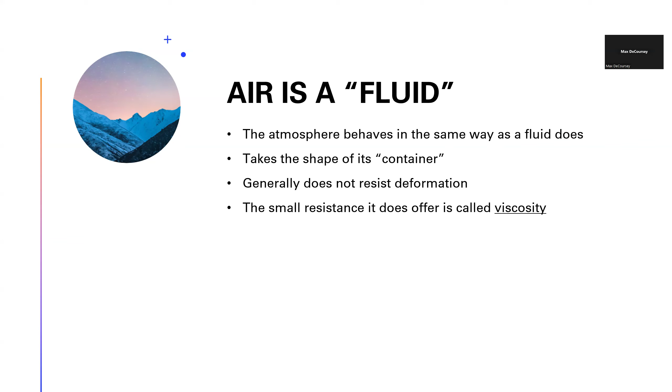They say that a fluid generally does not resist deformation—that's the whole idea of taking the shape of its container. So if you move it from one container to another, it won't try to retain its shape like a solid will. The small resistance it does offer is called viscosity. I don't know why the PHAK wants to talk about viscosity, but I'm just following the headers in the PHAK.

So the next thing they talk about is viscosity. If you don't know what that is, it's basically how runny a fluid is. Things like honey have a very, very high viscosity—the molecules in honey stick together very well. Things like water have a lower viscosity, and according to this chart, methanol has the lowest viscosity, nice and runny.

The only time you're really going to hear about viscosity specifically in flight training is talking about engine oil. The reason is the oil is more viscous, or thicker, when it's cold. That's why if you read a POH, they'll have warm-up times for the engine. When you start an engine, you'll want to leave it at 1,000 RPMs or whatever they prescribe for X amount of minutes or until the oil reaches X temperature. That makes sure you're not pushing this thick, very viscous oil through the engine at high power settings, which can damage it.

This is also half the reason why, sometimes when you start up, it's a good idea to lean the mixture out. By leaning the mixture, the engine runs a little hotter, which helps the oil heat up quicker, and it also keeps you from fouling your spark plugs, which we'll talk about when we discuss systems.

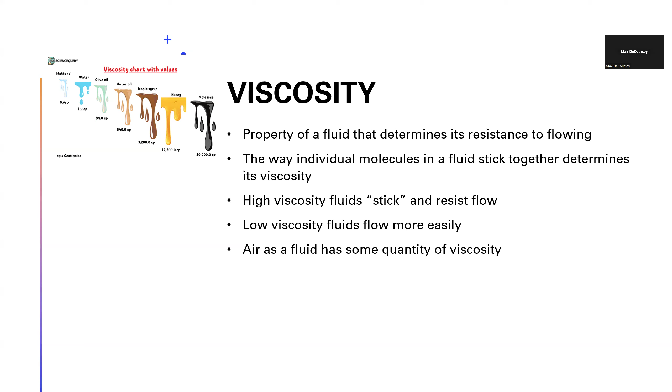Next thing they talk about is friction. It's impossible to create a perfectly smooth surface. Every piece of the airplane creates friction with the air. This picture is a zoomed in photo of the wing. It looks smooth, but microscopically there are little ridges. What this does for the airplane, besides being a form of drag, is...

...the particles very close to the surface of the airfoils have almost no relative motion. We call this the boundary layer. So the boundary layer is the layer of air close to the surface that does not move, for the most part, relative to the air around it. When you hear the term boundary layer, especially talking about stalls, you'll hear about separation of the boundary layer, and that's happening during a stall. That boundary layer becomes no more.

So that boundary layer, could you think of it as almost like a blanket of air that just doesn't move? It's so tight to the wing then. Yeah, pretty much. It's stuck in these ridges pretty much, and they create kind of a static layer of air on the airfoils.

I don't really know if it really does anything, quite honestly. I'm sure it has some sort of effect, but the only time you're going to hear about this boundary layer for the most part is when they talk about stalls, because when you stall, you exceed that critical angle of attack, and that boundary layer finally separates because there's not enough air making it over the top of the wing to create a boundary layer for you.

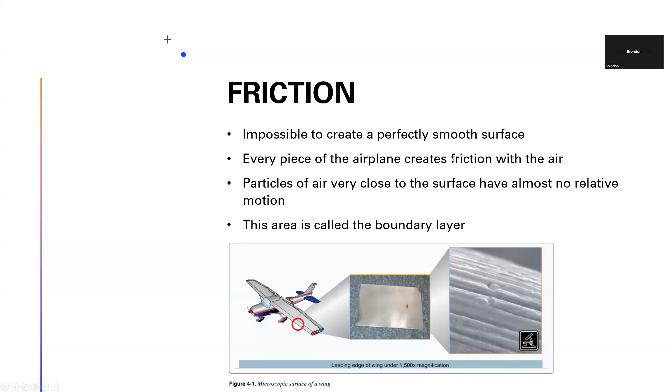Cool. Next thing they talk about is pressure. They define pressure as the force applied in a perpendicular direction to the surface of an object. Normally we measure pressure in pounds per square inch, so this is what you pump your tires up to. An object completely immersed in a fluid, in this case the atmosphere, will feel pressure uniformly around the entire surface of the object. We're feeling atmospheric pressure all around our body, on my arm, on my leg, not just on the top of my head.

And if the pressure exerted on one surface of an object becomes less than the pressure exerted on the other surface, the object will move in the direction of lower pressure. This is important when we're talking about performance and systems later: pressure in nature always wants to equalize. If you remember that the flow of pressure is always going to be from high pressure to low pressure, you can think your way through a lot of problems.

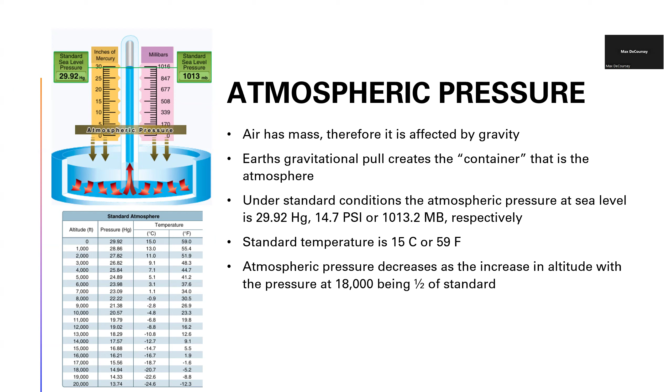As you remember from class, we have lapse rates. The lapse rate is the average change in whatever we're talking about, and we talk about it in terms of thousands of feet. So the average pressure lapse rate is 1 inch of mercury per 1,000 feet—every 1,000 feet you go up, you're supposed to lose 1 inch of mercury.

Now, in theory, does that happen? Not in my experience, right? Because we've talked about this a few times. That would mean the pressure at Delaware, since it's about 1,000 feet above sea level, should always be 28.92, and I've never seen that before. But we base observations and stuff like that off of this average pressure lapse rate.

The difference in these is because wet air holds heat better. Remember from class that water is a great heat sink—it holds heat very well, and it's harder to change the temperature of water. So its lapse rate is less than the dry adiabatic lapse rate, which would be completely dry air without any moisture in it. I don't know how you take the dry and wet adiabatic lapse rates and get 2 degrees as the average temperature lapse rate, but that is what they say the average temperature lapse rate is.

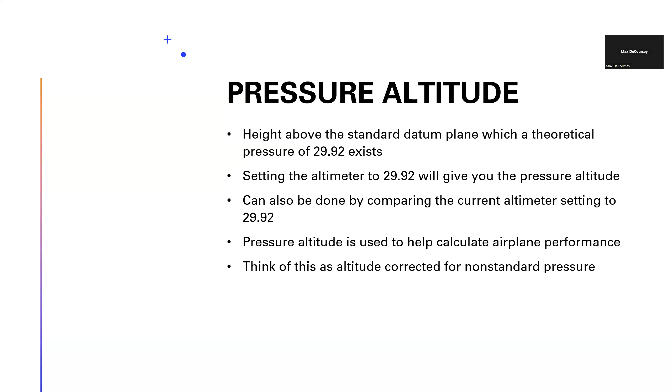The reason we need to know about pressure altitude is because it's used to help calculate airplane performance. A helpful way to think about pressure altitude is as altitude corrected for non-standard pressure. The reason I say that is because when we define our next term, density altitude, the FAA defines that as pressure altitude corrected for non-standard temperature. So this is the altitude the airplane feels like it's flying at. This is critical for determining how the airplane is going to perform, okay?

So a high density altitude—if the density altitude is like 8,000 feet, that's a bad thing. You don't want the airplane to feel like it's flying at 8,000 feet when you're only at 2,000. Low density altitude is a good thing. So sometimes in the winter in Ohio, you go outside and it's negative 800 density altitude, that's a great thing. That means the air is going to be nice and dense, and we know that the airplane loves dense air.

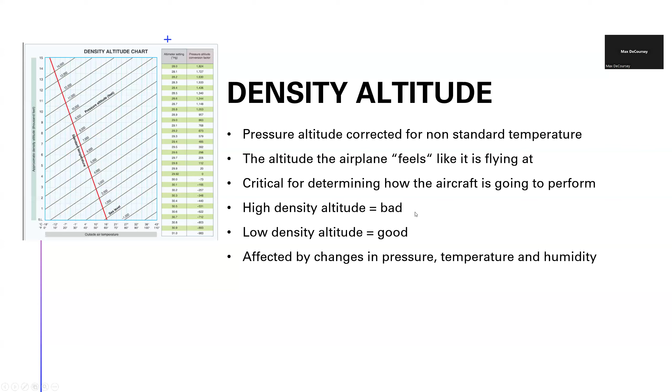Effects of temperature on density. To think through temperature, pressure, and humidity and how they relate to and impact our performance, whether they make it better or worse, all you need to know is how those things impact the density of the air.

An increase in density is a good thing for performance. A decrease in density is a bad thing for performance. So like we talked about in class, temperature on a particle level is just measuring the amount of collisions between the molecules in a substance—in this case, the atmosphere.

So when you have a really high temperature, the molecules are very active. You can see these lines drawn are larger, symbolizing that they're moving more. What this means is the density is going to be lower—these molecules expand because they're moving with much more velocity or vigor, and that reduces the density. That's going to increase our density altitude. A decrease in density increases our density altitude, which is a bad thing.

Lower temperature actually condenses the molecules, bringing them closer together. That decrease in temperature increases the density of the air, and an increase in density is going to decrease our density altitude—that's a good thing. It can get confusing talking about it, but if you can just remember what's happening to the density of the air, that's how you can think through what's going on.

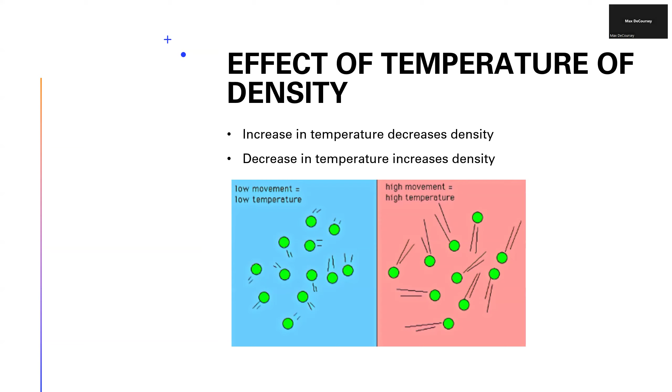There we go. The effect of pressure on density.

So higher pressure is going to be a higher density, and a lower pressure is going to be a lower density. It's the same picture from earlier, but on the right side here, this high density, or high pressure, would be great for us because all the molecules are packed nice and tightly together. This means more molecules will be going into our engine in the same distance compared to this.

A lower pressure is going to be a lower density. So if we flew across this line right here, we may only hit 3 molecules of air. If we flew across the same line here, we're going to hit 8 or 9 because the pressure is higher. So a lower pressure equals a lower density, which equals a higher density altitude. Worse performance.

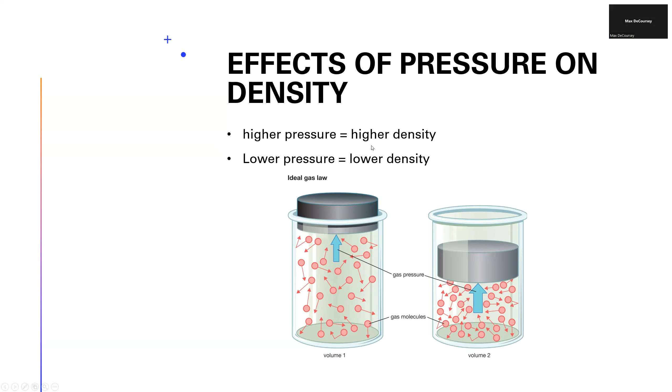Humidity and density. Humidity is the least of the 3 factors that contributes to our performance. But the way that it affects performance, water vapor is lighter than air, so when humidity is high, that air is less dense than lower humidity air. So high humidity equals low density, which equals higher density altitude. Low humidity equals higher density, which equals a lower density altitude.

Like I said in class, humidity is like the third distant factor when we're thinking about performance. In most, all performance charts will have you account for the atmospheric pressure and have you account for the temperature. I've never seen a chart that has a humidity value.

So this is more like, if you're already right on the edge of the performance you're comfortable with, and it's 100% humidity and very humid that day, it's probably just a good idea not to fly. It's just one more thing to consider.

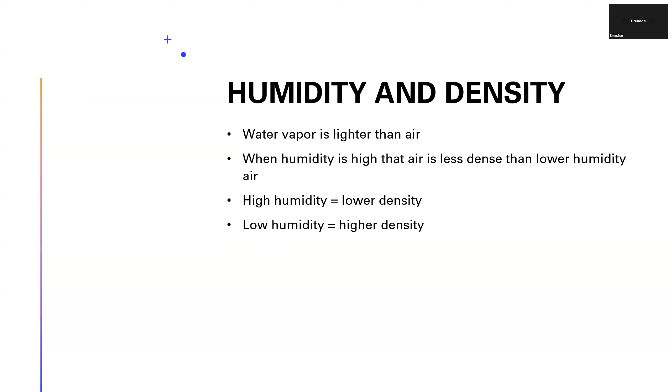Okay, lift production. So Newton's laws, these are good to review. The first law: a body at rest will remain at rest, a body in motion will remain in motion unless acted upon. The second one is force equals mass times acceleration. And the third one is what we are concerned about: for every action, there's an equal and opposite reaction.

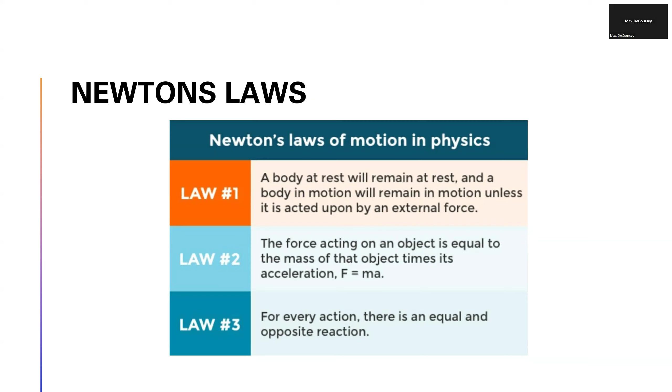So if you go in the PHAK, the FAA, because the PHAK is FAA sanctioned material, sanctions two separate explanations of lift. One is Newton's third law, and the other is Bernoulli's principle.

So for Newton's third law, it's as simple as: we fly along, the airfoil is shaped in a way that it deflects air down, and because it deflects air down, the air pushes the wing up, and we fly if you go fast enough.

You can apply the same theory to the jet engine. The jet engine pushes air out the back, and as it pushes that exhaust out the back, that force pushes the engine forward. Same thing with the prop - the prop is pushing air behind us, which is pulling us through the air.

So that is the way that you can explain lift with Newton's third law. I mean, you can do this in your car. You're driving down the road and you put your hand out the window and you tilt your hand up and your hand wants to fly way up. You tilt your hand down, your hand wants to move down. So that's one way to explain lift.

The next way to explain lift is Bernoulli's principle. Remember, Bernoulli's principle is the idea, or the reality, that when the speed of a fluid is increased, the pressure decreases. And remember that we consider the atmosphere and air to act as a fluid.

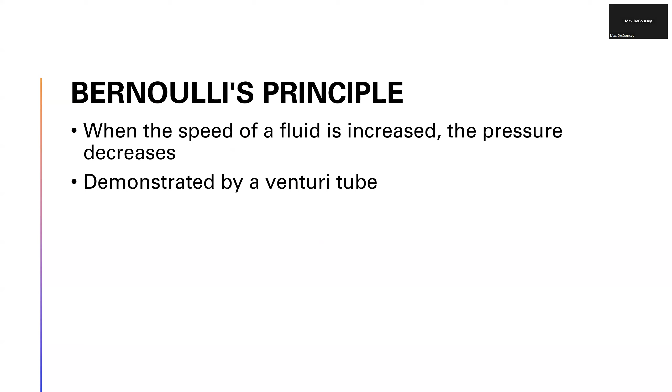And we can demonstrate this by a Venturi tube. You might remember that term from when we talked about carburetors - this is how carburetors operate on this principle also. But what happens in the Venturi tube is the inlet and the outlet are the same diameter, but on the inside, they have a little throat right here. What this throat creates is a choke point.

And what it necessitates is that the air that is up here gets squeezed, and in order to make it out at the same time as the air that was in the middle, this air has to accelerate. And when it accelerates, the pressure decreases. That's what you can see on these meters right here, so the pressure's here.

That looks like it's 5 and 5, the pressure and the velocity. Then as it goes through the inlet, through the throat, it goes up. The pressure decreases down to 3, the velocity goes up to 7. And then as it goes out, it equalizes again.

Okay, so this is an observable phenomena. To me, honestly, it kind of seems counterintuitive that when you squeeze this, the pressure goes down. I understand why the velocity increases, but that's what I was thinking too. You'd think squeezing it would make the pressure go up. Yeah, I think the only answer is that it speeds up so much that the pressure actually decreases because the molecules are putting space between each other. That's got to be the only explanation.

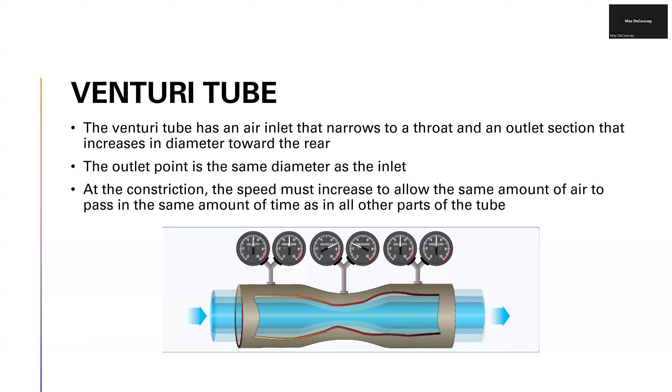But this is an observable theory. This is true, it might be a little counterintuitive, but this is what's happening in the carburetor. This is what a carburetor does in order to pull air in and then mix the fuel in the air, vaporize the fuel in the air. And this is also, as we know, the principle that allows the wing to fly, right?

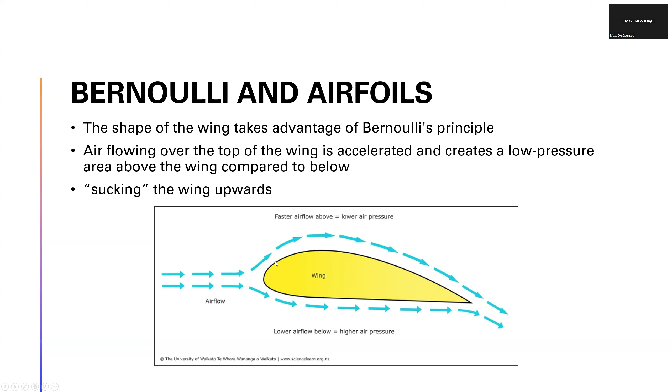One thing to talk about here, we've already defined angle of attack from class. Remember, angle of attack is the difference between the chord line and your relative wind. When you change the angle of attack, you also change the center of pressure along the wing. The center of pressure is also known as the center of lift, and that is where your lift vector or lift forces will be acting through on the wing.

So when you lower the angle of attack, the center of pressure moves backwards. When you raise the angle of attack, the center of pressure moves forwards. When you stall the airplane, your center of pressure moves as forward as possible, and then it drops all the way off, it goes all the way off the back. I think you're on the commercial written, that is a written test question, so you might see that eventually.

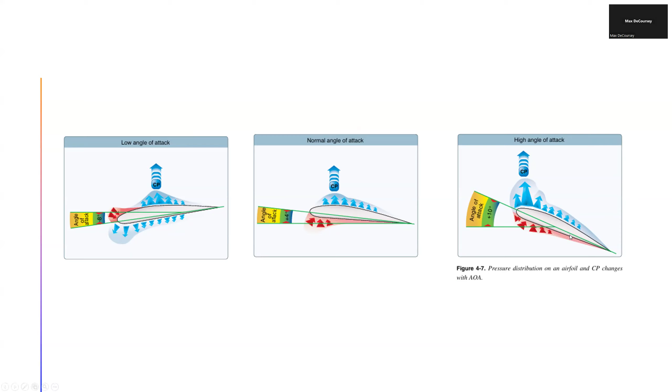Okay, any questions on that, on lift production, guys? Bernoulli and Newton? No, I'm good.

Okay, so now we're going to talk about aerodynamics. And I did the first like 3/4 of this chapter. This is a long chapter, so next week, if you guys join, we're going to finish this chapter and do the next one.

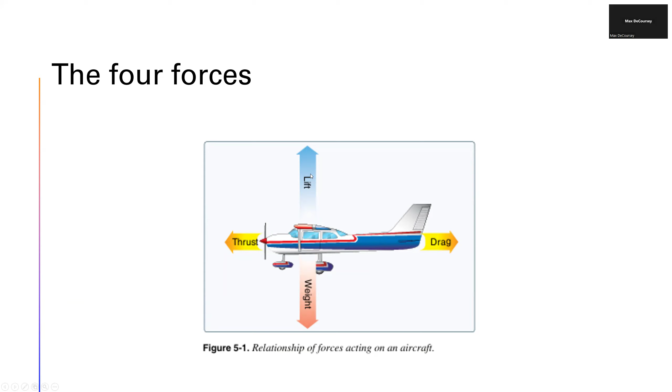But first slide, we've got the 4 forces, guys. Most of this is going to be review. Lift and weight, thrust and drag. So lift and weight in level unaccelerated flight. And the FAA, this is what the FAA says. Let's go to the chapter and I'll show you what they say. The sum of all the upward forces is equal to the sum of all the downward forces.

So it's right here, I don't know why. There we go. Not just lift is equal to the sum of all the downward components. And then the sum of all the forward components is equal to the sum of all the backwards components. They say this because you can see this, this is stabilized, so unaccelerated climb. Some of the lift is acting forward, and some of the weight is acting backwards as drag. I don't know, guys, that's what the FAA says.

But I know that's a written question on your commercial, and I think it can be on your private. I don't know if you've seen it when you've been studying or not. But so unaccelerated flight, that's what we're seeing. In accelerated flight, guys, accelerated flight can mean you're speeding up or slowing down. These are no longer equal. So in accelerated flight, your thrust is going to be greater than your drag. And in decelerated flight, your drag is going to be greater than your thrust.

Lift equation, guys, this is very important to remember. Like I said in class, you're never going to be given numbers or values and have to do actual math, but it's important to remember this so you can understand the different ways that you can affect how much lift the aircraft is producing. So CL, the coefficient of lift, this really is just the angle of attack.

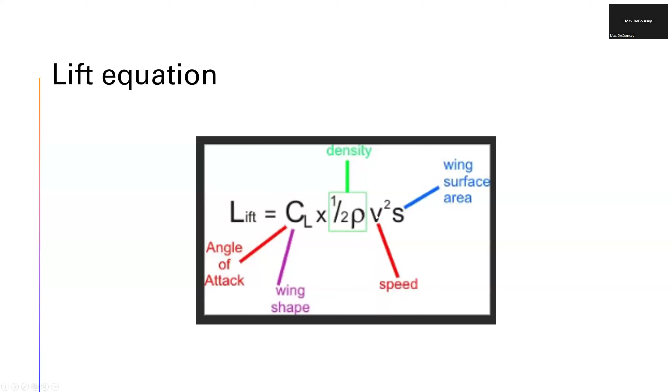Angle of attack, guys, just a review on angle of attack. The angle created by the difference between the chord line and the relative wind. Remember, always remember, the relative wind is always parallel and opposite the direction of flight, guys. This can be a written question for your commercial too. It's not parallel and opposite the horizon. It's not parallel and opposite the wing. If it was parallel and opposite the wing, then there would never be any angle of attack, right? So your direction of flight is going to determine where the relative wind is. And that is why we can stall at any airspeed, right?

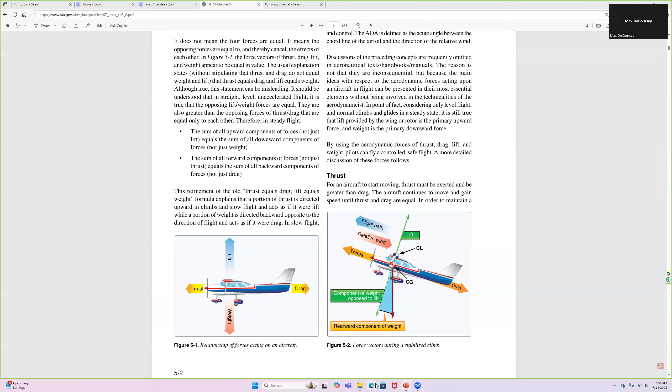I think on the next, I didn't put it in here. They're showing on this, they show a dive. I think I put it in later about stalls, but we'll just talk about it right now. And then we can skip later because I'm on a tangent right now. Jeez. I told you this was a long chapter.

So think about in a dive here, guys. You have all this momentum going downwards. And if I yank the plane upwards, I'm going to get an elevator response that raises the nose, but the airplane's still traveling downwards somewhat, right? So now we've just increased the angle of attack tenfold. And we're at this point, we might be going 150 knots. But if we yank that nose up, well, you're still traveling downwards for the most part. And you're going to be exceeding the critical angle of attack. So now you've pretty much killed yourself, depending on how low you got, because you're not going to be able to recover this stall quickly enough. So if you get into a bad dive, for some reason, you get disoriented or something, you need to be gently bringing the nose back up if you don't want to stall or break the airplane.

So you're saying the movies don't accurately portray flight properly?

Well, I don't know. Yeah, it all depends on technique, I guess, and the wherewithal of your airplane, right? Because fighter jets and World War II fighter planes could deal with this somewhat, but those guys also had a lot of training, right? So they knew the exact amount of back pressure they can give it in a dive and what can keep you flying. It's more, I think, honestly, if it's one controlled movement, you're going to be okay. But if you yank it, snap it, like if you just panic, pull full back, yeah, you can throw the nose right up and the airplane's gonna stall on you.

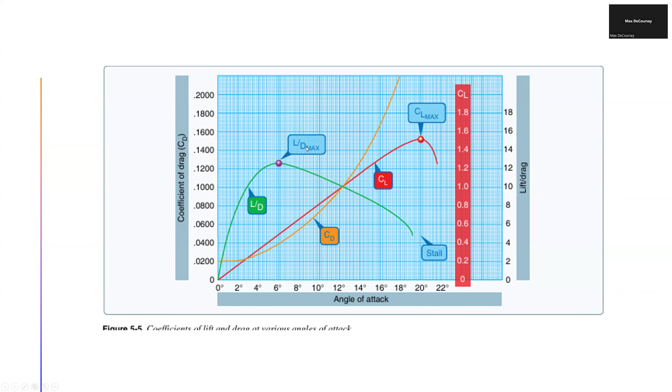So this is a chart that you will get questions about. Sometimes they just don't have anything labeled, and it'll ask you to label A, and it'll be lift over drag max, something like that. This is right out of the PHAK.

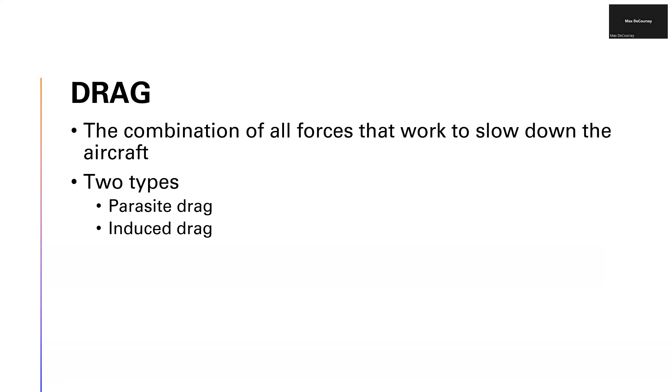So next we'll talk about drag. Drag, guys, is the combination of all forces that work to slow down the aircraft. There are two general categories of drag: parasite drag and induced drag. Induced drag is drag that is created as a byproduct of lift.

Induced drag decreases, so the total amount of induced drag decreases as speed increases. That's a written test question too. So induced drag, this comes from Newton's laws, right? You can't get anything for free. We create lift, so we have an opposite reaction, which is induced drag.

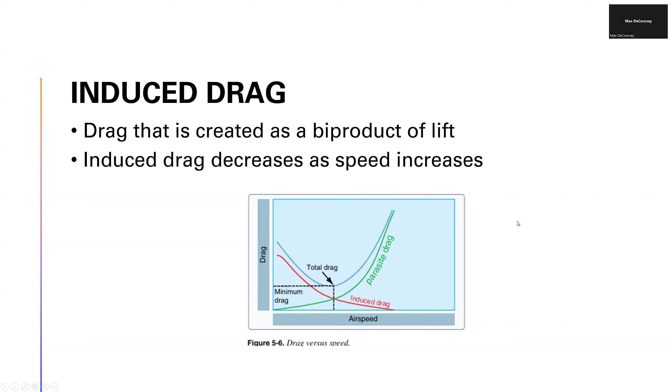Wingtip vortices are the same thing as induced drag. These are the result of the high pressure air below the wing spilling over the top of the wing in pursuit of the low pressure area. This is just the idea that in nature, pressure wants to equalize. So some of the air below the wing, and this happens not just at the wing tips but all the way along the wing, is able to spill over to the top of the wing.

And you can think about it as pressing down on the back of the wing, and that creates drag. So when we're flying very slowly, a lot of this air has the ability to get up on top of the wing and push down on us and create drag.

The faster you fly, the less of that air is able to catch up with the wing and push down on it. You also hear this called downwash. Same thing. So the slower an aircraft is flying, the more it affects it.

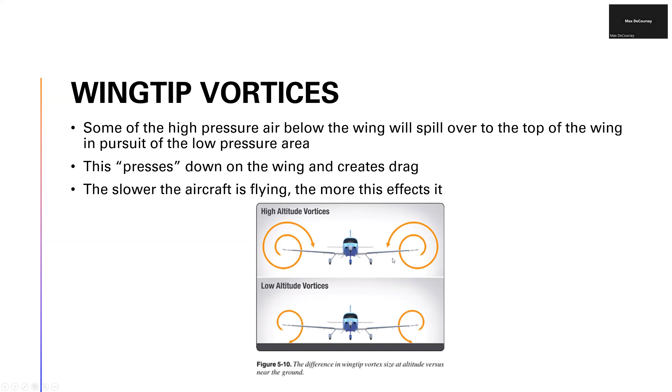What this is also showing here, guys, is ground effect. So ground effect is a significant reduction in induced drag due to ground interference.

As you get closer and closer to the ground, those wingtip vortices, the induced drag doesn't have enough room to get back up around onto the back of the airplane. That's why you feel a cushion or a sudden increase in lift. It's not technically an increase in lift, it's a significant reduction in induced drag.

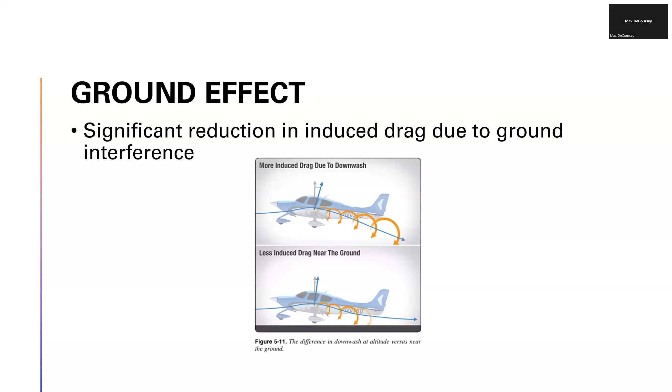Remember, guys, this takes place within one wingspan of the ground, and it's an exponential occurrence. So the closer you get, the amount of ground effect increases exponentially. Something like 60 or 70% of the ground effect is within a third of your wingspan from the ground. So start coming in fast, guys. This is why you float really long. That ground effect reduces all that induced drag, and now your lift to drag ratio is really high.

Parasite drag, guys. There are 3 types: skin friction, form, and interference. These are all straightforward. Skin friction is literally just drag due to friction. We cannot make a perfectly smooth surface, so there's going to be friction on the aircraft.

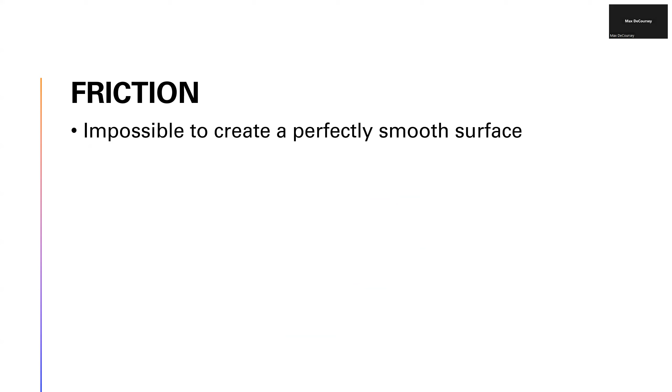Interference drag is caused by the convergence of airflows along the aircraft. When you fly, air sticks along the fuselage and creates its own kind of stream, and air sticks over the wings. When those two come together at different angles, they create eddies, turbulence, and drag. So airplane manufacturers try their best to smooth these confluences out. That's why you see wing fairings and fairings where different airstreams intersect.

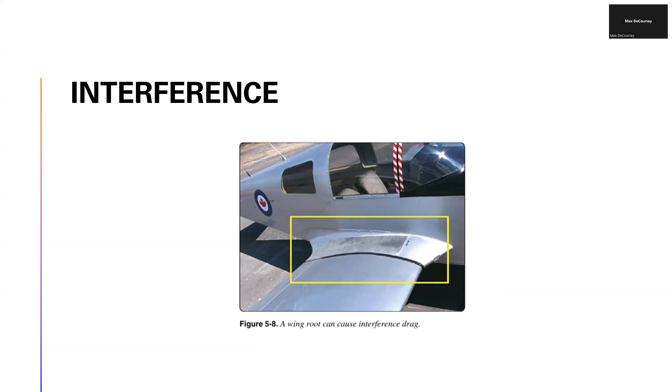Wake turbulence, guys, is a big thing. This is one of the big things in ground school that actually ends up being applicable to flying.

Going back to that last slide, how you're saying with cars being more aerodynamic, especially the electric ones, they're all flatter now on the front. I never understood how this is more aerodynamic when things are getting boxier, not rounded. I think they're valuing the look over the function. I'm like, this is the complete opposite of what you want. So it's not just me noticing the stupid designs they're doing.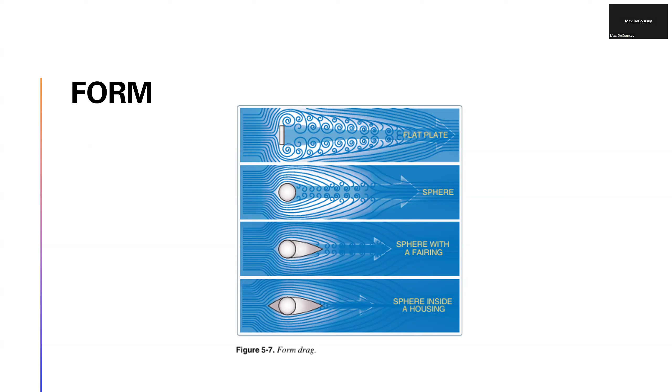All right, wake turbulence, guys. Like I was saying, this is actually practical, good to know this stuff. Wake turbulence is created by all aircraft, and we're mainly concerned about wake coming from aircraft much larger than ours.

So if you're in a 172, you're not worried about other trainer airplanes, even like an Aztec or small piston twins. Once you start getting into a Beechcraft or something like a King Air, you're going to be concerned, mainly because they've got those big props spinning and turning up a bunch of air. But wake turbulence, guys, is just induced drag. It's the same thing, so wingtip vortices and wake turbulence are the same thing.

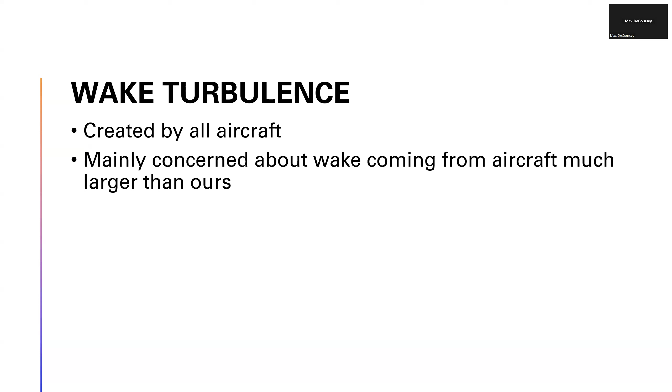Wake production - we talked about this in class, but it's good to review. Wake is only produced when the aircraft's wheels are off the ground. So when considering what actions to take to avoid wake turbulence, whether taking off behind an airplane that's landing or behind one that's also taking off, remember that wake only begins when the aircraft's wheels leave the ground. You can think through whether you should take off after where this person landed, or before where they landed. The three things that make wake production the greatest are when the aircraft is heavy, clean, and slow.

This is because in all three of these instances, the aircraft has a higher angle of attack. The heavier the airplane, the more lift they need to produce, so they need to raise the nose. When an airplane is clean, with no flaps, it necessitates a higher angle of attack, because flaps allow us to fly at a lower angle of attack at slower speeds. And when an airplane is slow, you need a higher angle of attack because you're not producing lift from your airspeed, so you need to pick the nose up. So those create more induced drag, which is our wake turbulence.

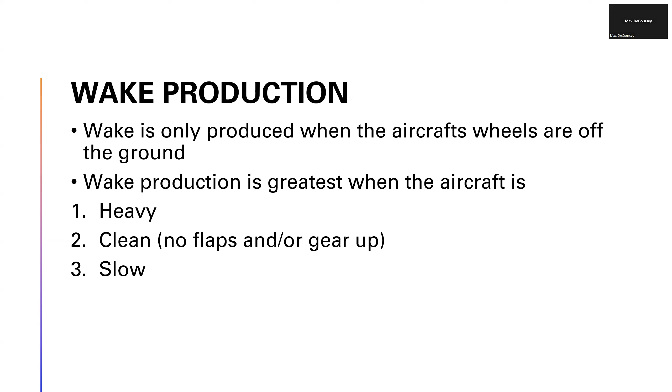So wake avoidance is pretty simple. When flying along in cruise, you want to stay above the flight path of aircraft that are much larger than you. And if you can't be above them, you want to be at least 1,000 feet below them, because wake will sink and can exist for a few thousand feet. Now it will dissipate as it drops, getting less intense, but there have been accidents.

There's a famous accident where a Citation 10 flew below a 747 and it flipped them over. I can't remember if they broke up and crashed and died, or if they just flipped over and everything was fine. But this really is ATC's job - they do have wake turbulence limits and distances that they're supposed to follow for you. But obviously it's still on you to make sure you feel safe.

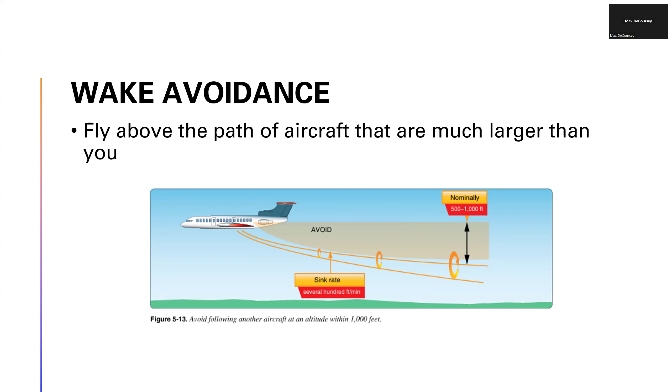This is just showing the wake ending when they touch down and beginning when they rotate. So if we're taking off and this airplane just landed, we want to take off beyond where they landed. If we're taking off and this airplane just took off, we want to take off before where they took off, and we want to outclimb them and not follow them. Or, what's more likely since we won't outclimb a jet, turn away from their flight path as soon as we can - rotate before them and get out of their flight path as soon as it's safe, because you do not want to be riding through this. It can cause an accident and, especially close to the ground, can kill you.

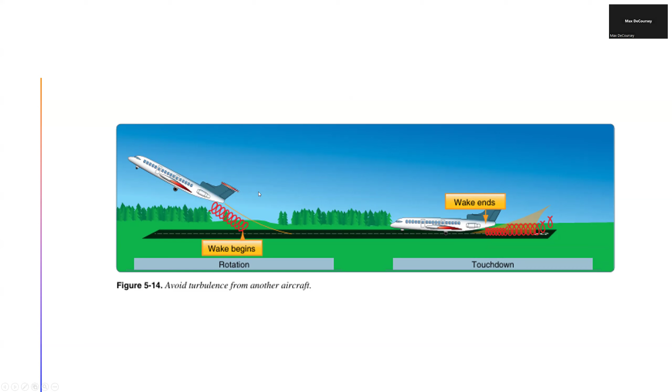So what can happen? This is another written question. The most dangerous time for wake turbulence is going to be a light crosswind. What that does is keep the vortice that is upwind over the runway for a longer time. In practicality, this means if you have a light wind, after an airplane much larger than you lands, you should observe at least 2 minutes before you take off. If you're at a towered airport, tower will do this for you most of the time.

Sometimes they may not be paying full attention and try to clear you. At that point, you should ask them if you can wait a minute, or not even ask them - tell them you're going to wait a minute.

That is, yeah, a practice question I've had, where they talk about like you're on this, actually opposite runway, like an X kind of setup. So one jet goes after, and it's got this much wind - where's it going to be? And it's exactly what you're talking about, how it's going to just blow into where the little plane needs to take off at. Yeah, exactly.

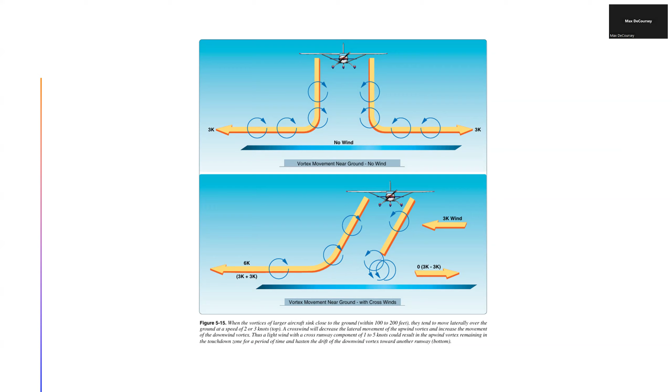So, don't be afraid to take authority in that situation. Tell them you want to wait another minute or so.

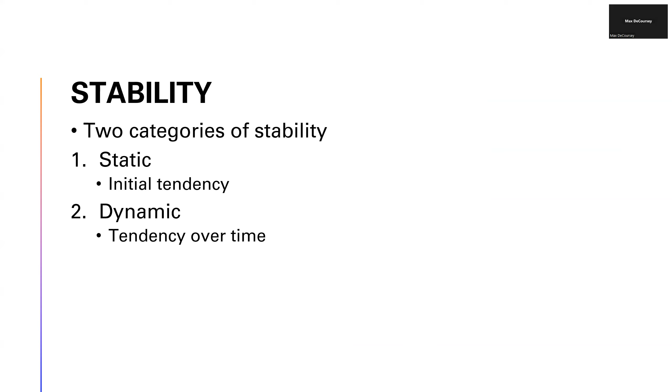Stability, guys. There are two categories of aircraft stability: static, which is the initial tendency of the airplane, and dynamic, which is the tendency over time. This is what the airplane's going to do if it's disturbed from its equilibrium.

If we have positive static stability, and the airplane, or in this case the ball, gets disturbed to the right, it's going to swing back to the middle. That's going to be its initial tendency, to come back.

Neutral static stability is if the airplane gets disturbed, it's just going to stay in the position it was disturbed to. So if it gets pushed into a right bank, it's just going to stay in whatever right bank it got pushed into.

Negative static stability, which is the worst, means its initial tendency, if you get pushed into a right bank, is to keep banking right if you don't do anything about it.

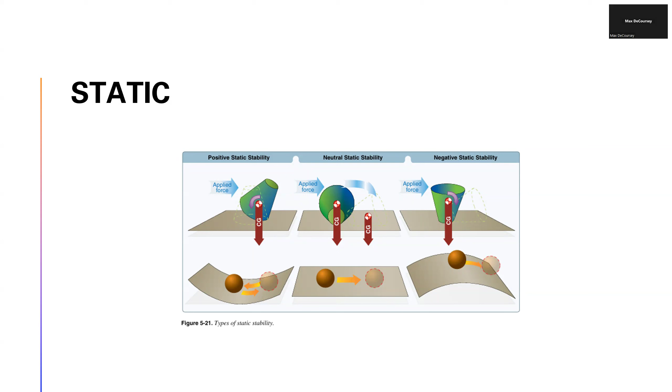Dynamic stability is your airplane's reaction over time. With positive dynamic stability, if the airplane gets disturbed it wants to go back to its equilibrium, so it'll dampen those oscillations until it eventually goes back to normal.

Neutral dynamic stability means over time the airplane just stays in that same oscillation, keeps going up and down, but it's not getting worse.

Negative dynamic stability, once again, is the worst of all. If it gets disturbed, it begins to oscillate and the oscillations get bigger. So that's what negative dynamic stability is. Remember, static is the initial tendency.

Dynamic is the tendency over time. For both of them, positive is going to be the best outcome, and negative the worst.

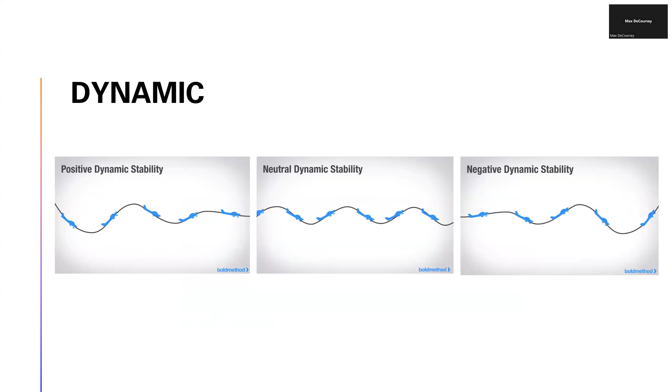Is this the last slide?

We're getting pretty close. Next thing, guys, we didn't talk about this in class, but it's good to know: dihedral. Dihedral is when you construct a wing, as you can see on this slide, to have a positive degree slope from the root to the wingtip.

Why they do this is it's a stabilizing technique. What can happen is you get a gust and it induces a roll, creating a side slip. When you get a side slip, because the airplane is flying with the nose crooked, the relative wind is all on this wing.

What the dihedral does is, because this part of the wing is higher than the root, it has a higher angle of attack. So it starts creating more lift, and it will raise the wing back up, making the airplane more stable.

The airplane will naturally right itself to a point. If you get a really big gust and you're put into like a 60-degree bank, you're going to have to use some control input. But this is why a lot of times if you catch a gust or something, you don't even have to react—the airplane will right itself because it has the correct amount of dihedral.

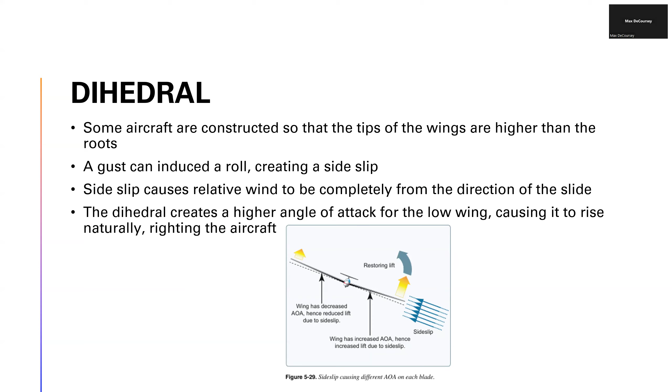You can also have anhedral. You can see this on the big tanker military planes. What this does is it actually helps them turn better, it just promotes a roll. I can't really explain it too well, but that's why you have anhedral—because they're bigger and heavier, it helps since their control surfaces might not be as big as they need to be, so they have anhedral to help them.

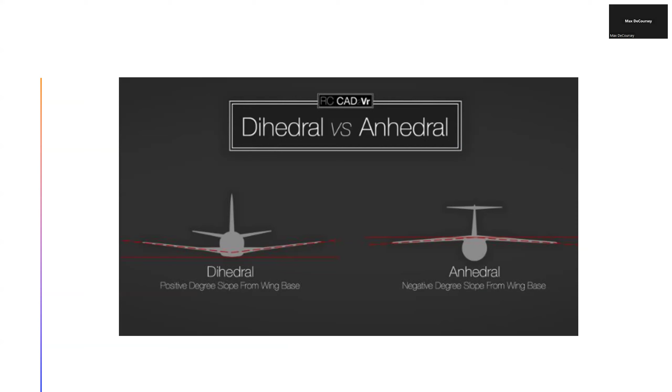Turning flight—we talked about this in ground school, but it's always good to go over it. In level flight, our lift is acting straight up and our weight is acting straight down. When we want to make a turn, we need to trade some of our vertical component of lift for horizontal component of lift. Now the resulting lift vector is out here, and the resulting load factor is this way—we've traded some of this vertical lift for horizontal lift.

What's going to happen if we don't change our angle of attack or our speed? We're going to descend, right? So we will pull the nose up in this turn in order to stay at the same altitude. This is why our stall speed increases in a turn—because we have to increase our angle of attack.

As you can see on the right, on the steeply banked turn, the steeper the bank, the more vertical component of lift we have to exchange to horizontal component of lift, meaning we have to raise the nose more. That puts us closer to a critical angle of attack, which increases the stall speed, which is not a good thing. The load factor we're getting is due to centrifugal force.

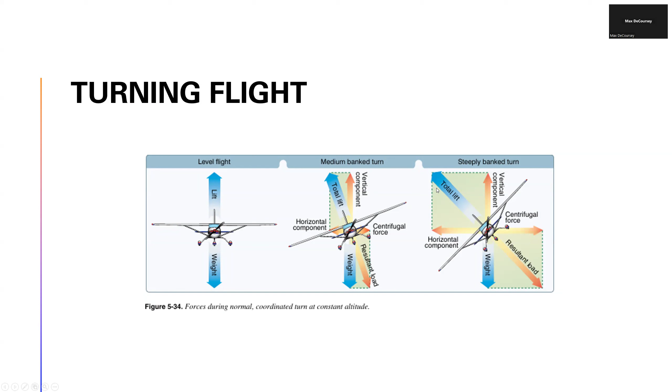All right, stalls, guys. This is something I beat to death with everybody that I teach. Stall occurs when the aircraft exceeds the critical angle of attack. When this occurs, the boundary layer separates from the airfoil and lift is no longer sufficient to support the aircraft. Lowering the angle of attack will fix the stall.

Stalls have nothing to do with airspeed, okay? The only reason we talk about stall speeds is because that is the best representation of your current angle of attack in the airplane, if you don't have an angle of attack indicator.

What I mean by that is the manufacturers went and test flew the airplane, and they found that if you are maintaining your altitude at this airspeed, the only way for you to do that is to be pitched up high enough that you're going to stall. Does that make sense?

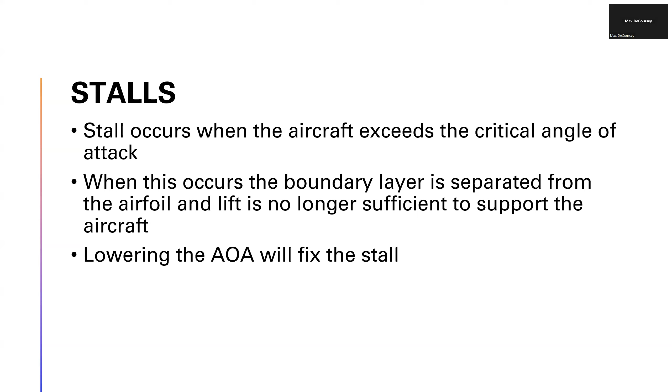If we were able to have angle of attack indicators in the airplane, you could look at that and see if you're going to stall, and not have to use airspeed to determine if you're going to stall. The only reason I'm stressing this is because you need to know that you can stall at any airspeed, like our demonstration that we talked about earlier, if you exceed the critical angle of attack.

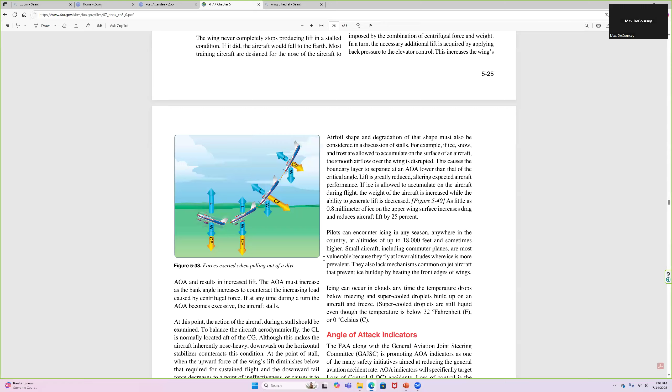Okay, that was the last slide. But that's the important part when we're talking about stalls.

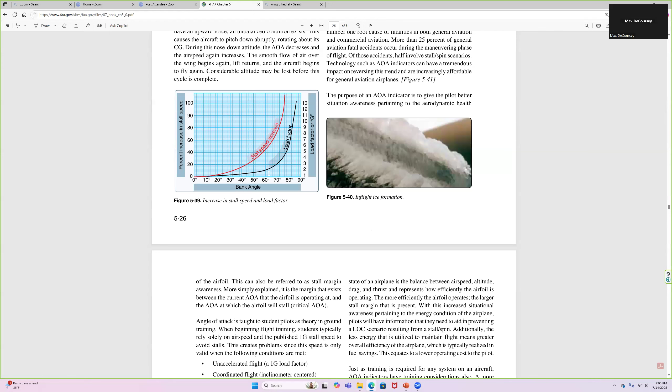You can see here, this is a load factor chart, which I think you get on your written. As your load factor increases, which corresponds to your bank angle, your stall speed increases exponentially. So the more you bank, the more you need to raise the nose, the more load you put on the airplane, the higher your stall speed is going to be, which is not a good thing, guys. We do not want a high stall speed.

So I didn't prepare the rest of this because I thought this was going to take longer than it did. So we'll go over this stuff next week, chapter 6. Let's see what 6 is. We could probably get away with doing chapter 6 and 7 also, because we don't really need to talk about the flight controls too much in depth since they're not that important to what you guys are doing.

Do you guys have any questions for me? Anything about your written or anything? I think I'm good. Kenneth, got anything for me?

Not really, because a lot of them, at first I had a question, and then it was either I knew what I was doing, or something else got in my head and I did some other kind of thing. I figured out what it's talking about and it makes sense kind of thing. It's just more seeing it, you know, some of them I just mix up, a question from another question that's similar. It's not like I don't know, but it's like, oh, this was similar to another one, and I mix them up. Overall it doesn't matter. Some new questions popped up that I've never seen, and some I got completely right, and others I was kind of close, so I just chose the one that was close to the answer, that trickery one. Just the close enough one is what I picked.